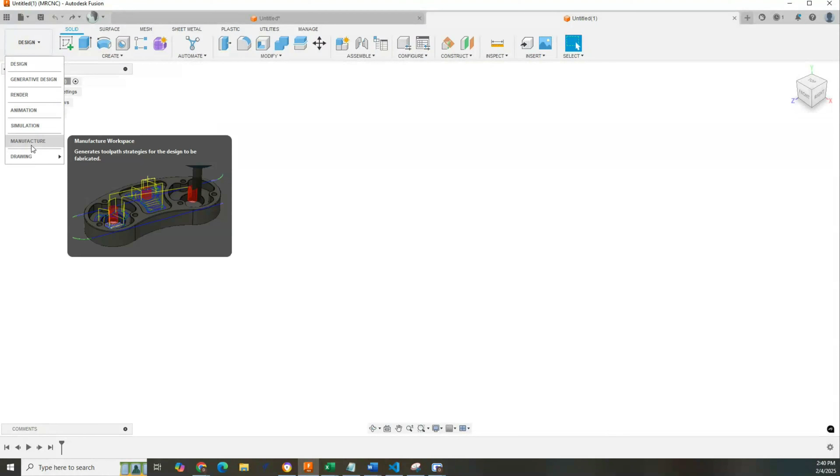As I said, I'm going to walk you through in Fusion 360 how to make that 2-inch square on the Alpha Arc. It's going to be super easy. First, I need to make sure I'm in the design workspace. There are a couple different workspaces we'll be in, but I'm going to start with the design workspace. I'm going to look at my document settings here. So I hit that little arrow. I'm in millimeters right now. I'm going to switch things over to inches. So now I'm in inches.

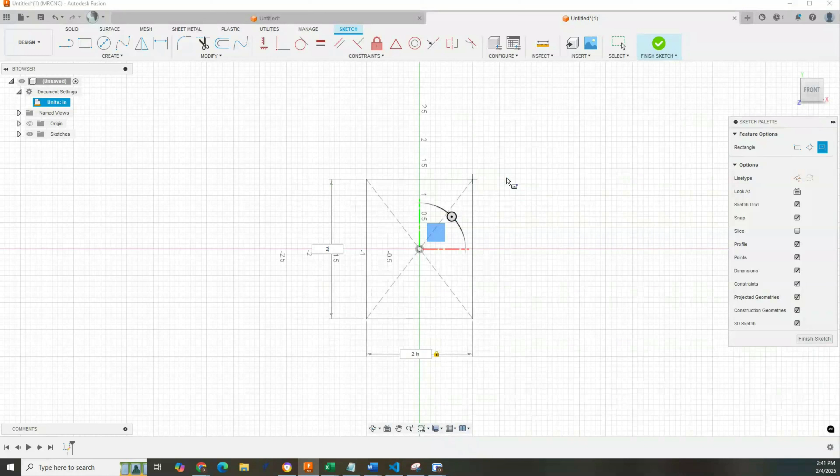I'm going to go to Create, Sketch, and I'm going to select this plane right here. And now my sketch palette is up. I'm going to go to Create Rectangle, Center Rectangle. I'm going to select this snap point. I'll click it, and as I start to expand, I can dimension it. So I'm going to hit 2 inches here. I'm going to hit the tab button. I'm going to hit 2 inches here, and I'm going to hit enter. From there, I'm going to finish the sketch.

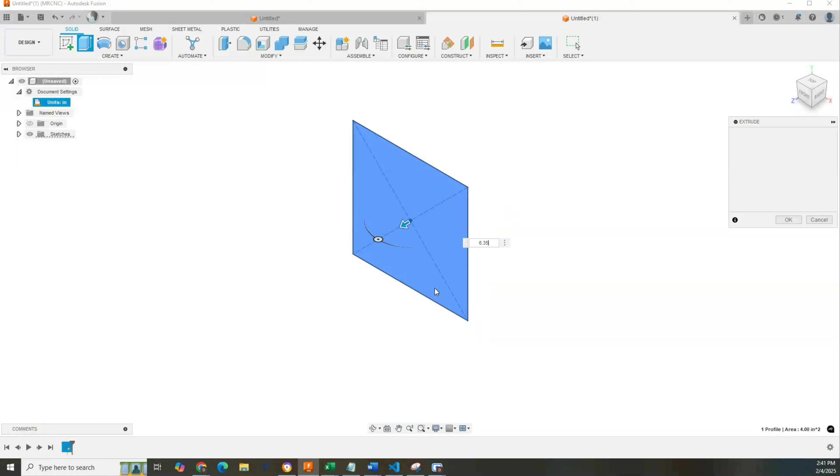Now, I could do my plasma CAM off of this sketch, but I like to have it as a solid body. So I'm going to right-click the sketch, and I'm going to hit extrude, and I'm going to tell it it's 0.25 inches. Now, I want to add a radius to this because I want to demonstrate a little bit that we talk about in the operating guide about M666 and M667, turning the torch height control on and off.

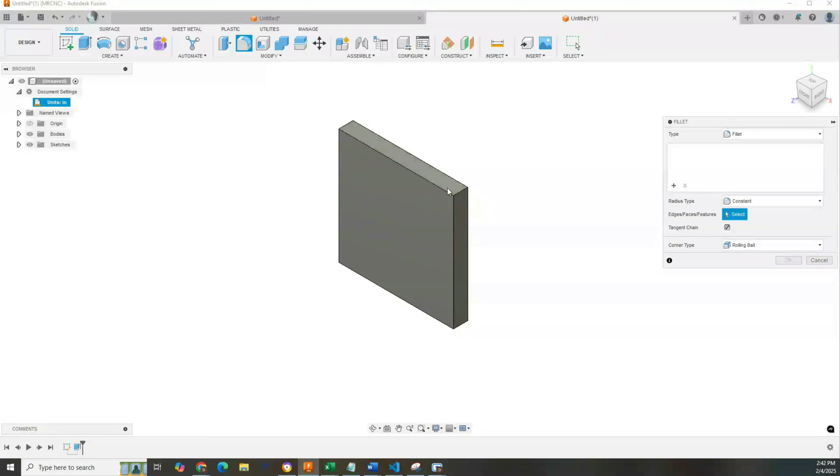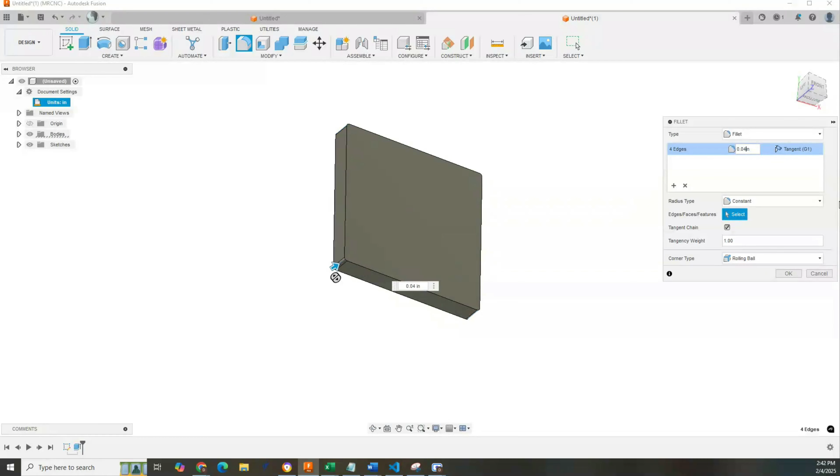So what I'll do here is I'm going to hit this radius button here, or fillet, as Fusion 360 calls it. All right, and I'm just going to select each one of these edges here. So don't select this, but select the edges there. And it'll kind of see through there. If yours isn't seeing through, you can rotate over and click this edge. So I have 4 edges selected. And I'm going to make this 0.04 inches. All right. And there's a reason I'm doing that I'll show you in a second.

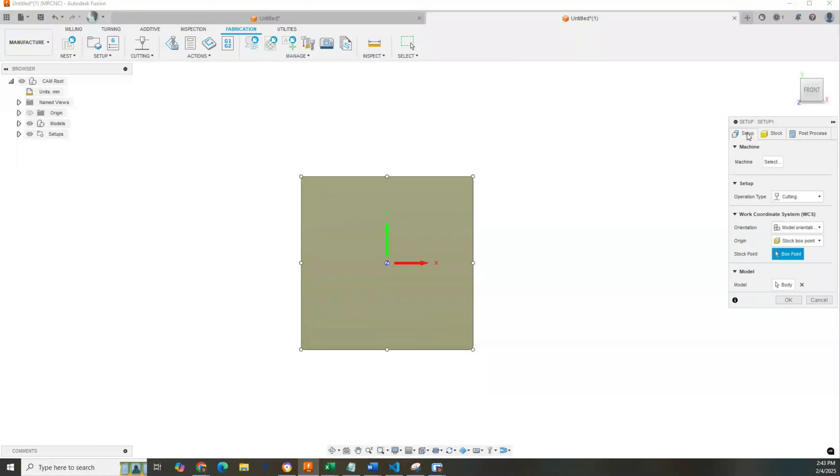All right, so from here, I'm going to switch over to the manufacture workspace. Now that I'm in the manufacture workspace, I'm going to go to fabrication if I'm not already there. I'm going to click the setup button. And on my stock, I'm going to select this lower left corner. But first, I'm going to go to the stock tab here. And I'm going to tell it I don't want any additional stock. This isn't a milling operation where I'm going to mill something away. We're just cutting this square out of a larger sheet of steel. So I'm going to go to setup, and I'm going to select this bottom corner as my stock origin. Okay. I'll tell it okay.

Now I see that my units are in millimeters here. I actually want to work in inches, so I'm going to click on that, and I'm going to go to inches. All right. From here in the manufacture workspace with the fabrication menu, not a lot of options. We just have a 2D profile. Okay, so we're going to go to 2D profile, and I'm going to go up here to this second tab where I select the contour that I'm going to cut, and I'm just going to select this contour here.

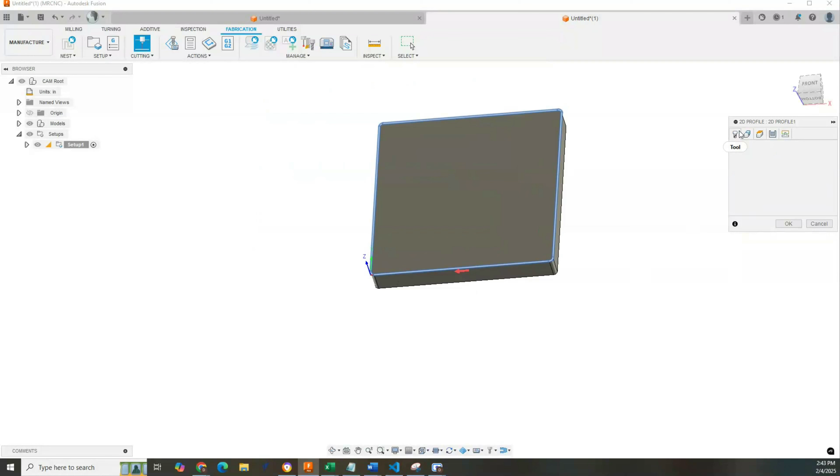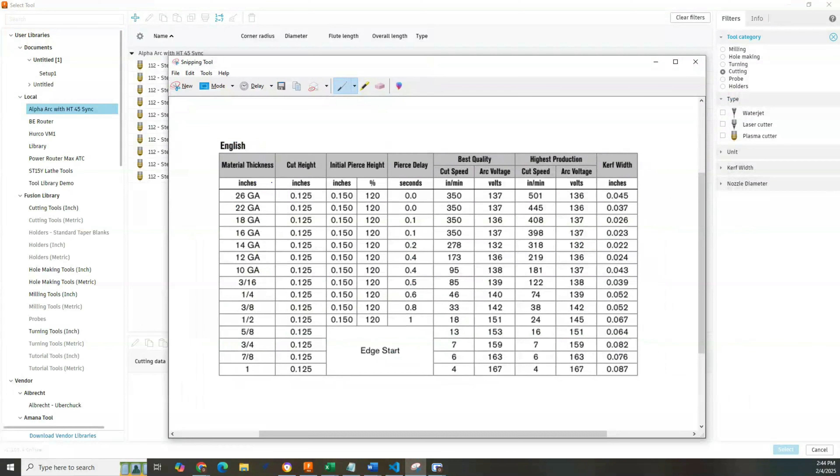I'm going to come back over here and select my tool, and as I wait on that to come up, I'll explain that I already have some things set up here. So I have this available to you. There'll be a link in the operating instructions where you can get to it. This has some of the parameters already set up for the different thicknesses that are in the cut chart for this particular Sync module.

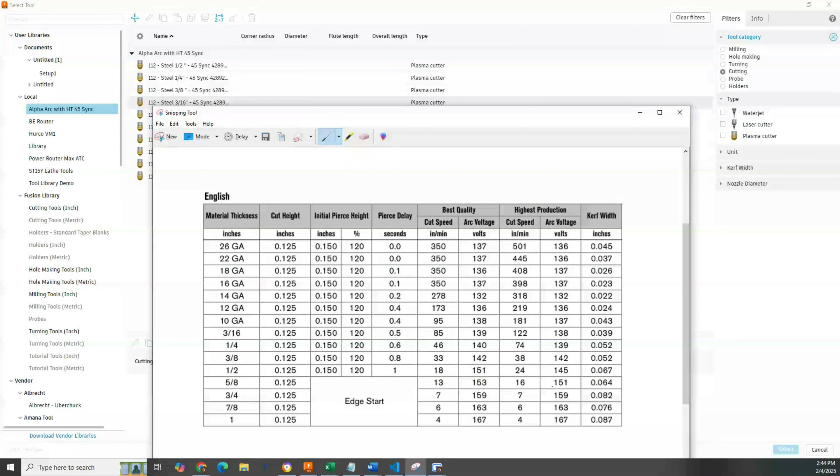So on the Hypertherm 45 Sync, this is the cut chart that you want to follow, and we talk about that extensively in the operating guide. But I have already saved a lot of these parameters, like what my kerf is for the different sizes. I've saved that in this library. So I'm just going to select steel 1/4 inch, and then I'm going to click select.

And it already put things like my feed rate. So you can see it's got a feed rate of 46. And if I look at my cut chart here, the best quality cut setting is 46.

One thing to know about this, some of these are driven by the settings or, quote unquote, the tool I'm selecting. It's all tool 112, because for the Masso control to use the plasma, it's tool number 112 always in the Masso control. But when I had that tool library, all I was doing was selecting different sizes that I had saved in there, so it would automatically load things like my cut speeds.

There are other things that are going to be selected in the post-processor options, like these initial pierce heights and cut heights. The good news, though, with this particular cartridge on the 45 sync, whether it's aluminum, steel, stainless steel, they all use the same cut height and all use the same initial pierce height. There are definitely some changes when it comes to arc voltage, but some of those that I'll show you in the post-processor options are always going to be the same on this particular cartridge. If you go over to the fine cut cartridge, then that's not going to apply, but we have charts in the operating guide for that you can follow as well.

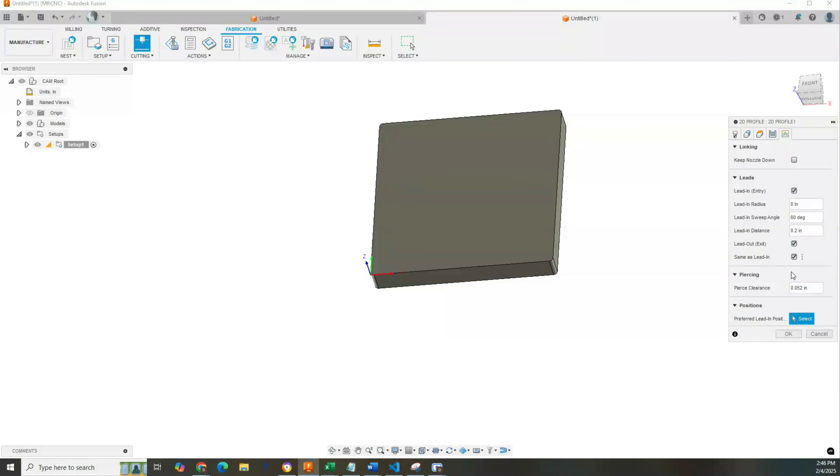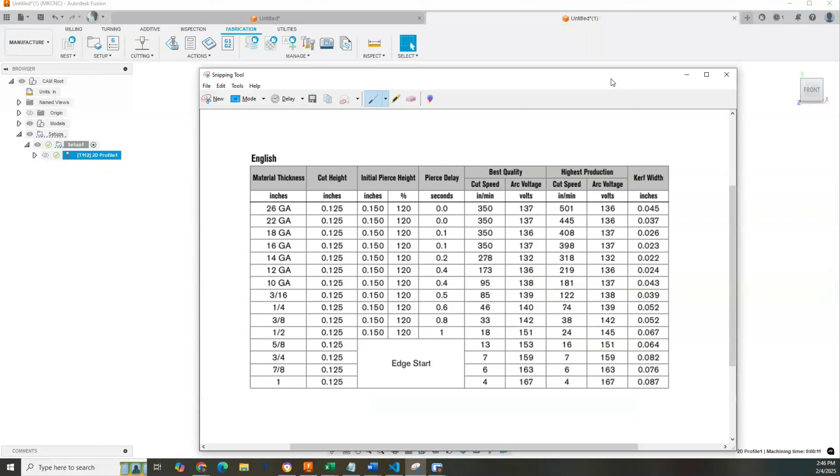So I'll move this out of the way, and I'm just going to take a look at my lead-ins over here, and I see it's doing a little bit of lead-in. We'll just make that a round number, 0.2. I don't have to, but I've got lead-in and lead-out there. So I'm going to click OK and see what it gives me. So here I have my lead-in and lead-out, and it goes around with an offset that's going to do the kerf compensation. And again, the kerf is called out here in the cut chart, and I have already saved it by saving that tool in my tool library. So it already knows that I have a 0.052 kerf.

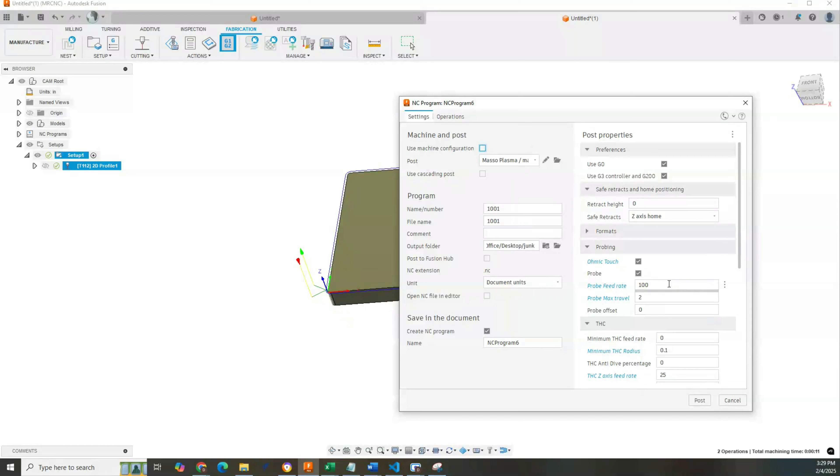All right, now that we have our profile set up, we're going to move on to post-process. So I'm going to click this post-process icon. I already have the Masso Plasma post-processor as an option in my post-processor list. We cover in the operating guide how to set that up, because you're most likely not going to have it by default in Fusion 360. So we have certain things that we must set in these post-processor options to get a good cut. And I'm going to bring over another screen here and talk about that.

The cut height is always going to be set to 0.125 inches with the sync cartridge, part number 428925. Initial pierce height, always set to 0.15 inches with the sync cartridge 428925. Probe feed rate, we recommend just setting this at 100 inches a minute and forgetting it. You may think that's a little aggressive. You can back that down to 50 or 30 inches a minute. 100 inches a minute is probably about the tippy top of what I would go on the probe feed rate.

The THC Z-axis feed rate, that is the feed rate at which the Z-axis will move when it's under torch height control. The minimum THC radius, we talk about this in the operating guide. Let's just set that to 0.1 inches and forget it. Minimum, I should learn to spell, minimum THC feed rate, set that to 10 inches per minute. If we're going super slow, we probably want to have the post-processor turn that THC off.

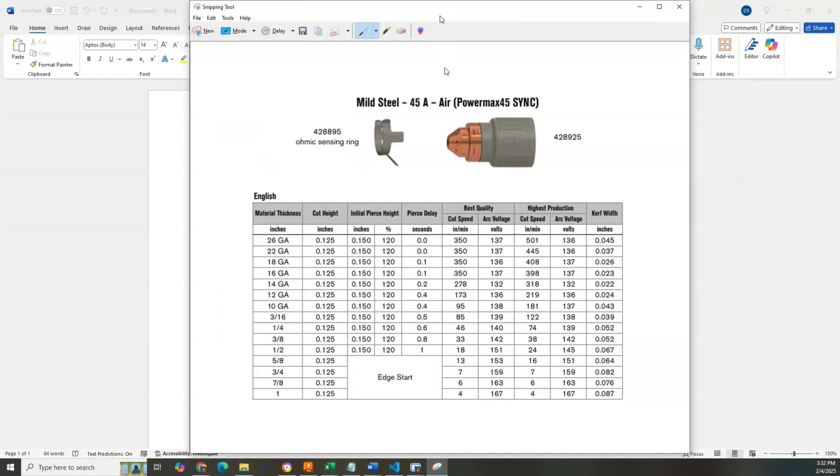All right, so I'm going to bring this up here and show you guys this. So again, the cut height and initial pierce height are always going to stay the same as long as I have this particular sync cartridge in there. But things like the pierce delay and arc voltage, here and here, I need to refer to the cut charts to get those right.

All right, so here I'm using 1/4 inch steel. I need a pierce delay of 0.6 seconds. My arc voltage should be set to 140.

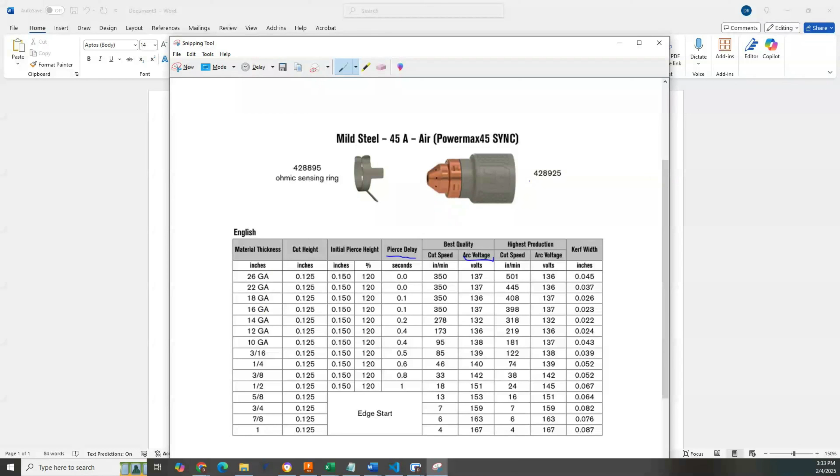Now, remember when I selected my tool, I had saved different speed settings and kerf widths or kerf offsets for this particular consumable cartridge, according to the chart here with the different material thicknesses. So let's see how we actually put it in. All right, I'll move this back over.

So the things that I need to make sure are set: the cut height set to 0.125 inches. All right, there we go.

I'm going to pause here and talk about something important. 0.125 inches means 0.125 inches. If I was in millimeters here and this said 0.125, that interprets it as 0.125 millimeters. So I just recommend doing your CAM here in inches. If not, convert these to the millimeter equivalents.

All right, so the cut height, 0.125 inches. The pierce height, it says pierce height, same as initial pierce height, 0.15 inches. The probe feed rate, I have set to 100 here. The THC Z-axis feed rate, I have set to 25. The minimum THC radius, I've got at 0.1 inches. And ohmic touch, I have enabled here. I have this checkbox enabled because I want to use ohmic touch for it.

Pierce delay, I need to refer to my cut chart. So pierce delay for 1/4 inch is 0.6. All right, let me move this away. Pierce delay 0.6.

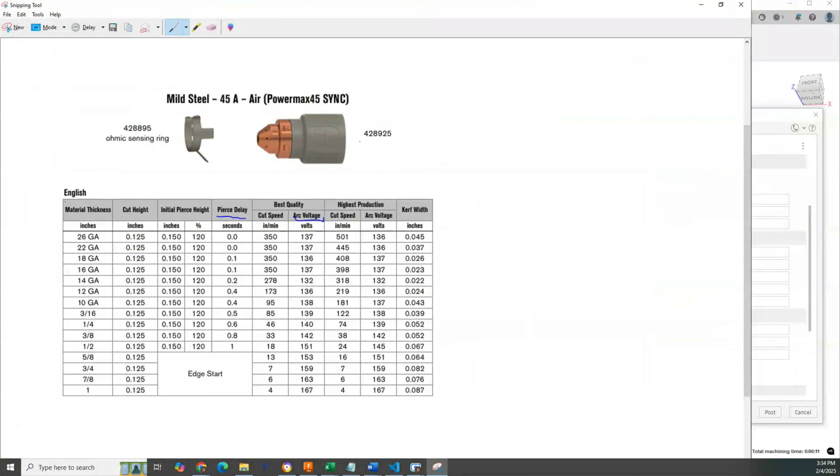THC voltage, I have to set that. So I look here, and for 1/4 inch, it's going to be 140. All right, so I'll move this out of the way. I'll set that to 140.

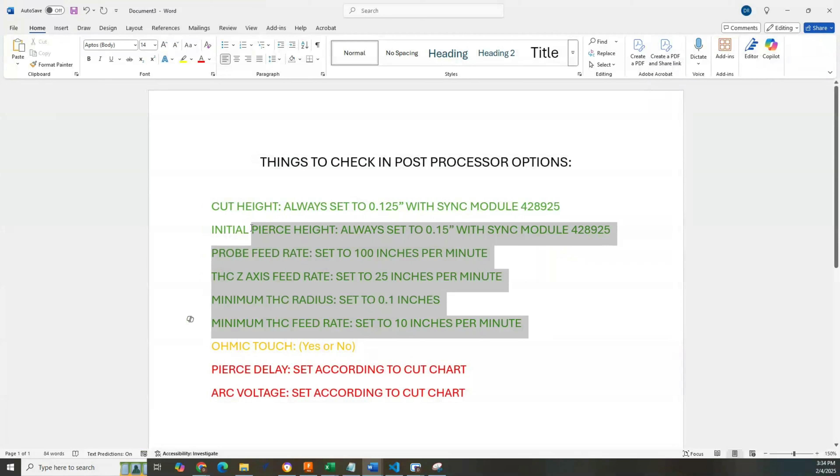Again, don't get overwhelmed thinking, oh gosh, there's so many settings, because once you set these up, it's pretty much the same every time, as long as you're using this particular consumable cartridge on the Hypertherm Powermax 45 SYNC.

This is going to depend a little bit on whether you have a little floppy thin gauge plate, or you're cutting something that you can use the floating head on, and maybe you've got a bunch of water on there. Refer to the operating guide for the do's and don'ts on that.

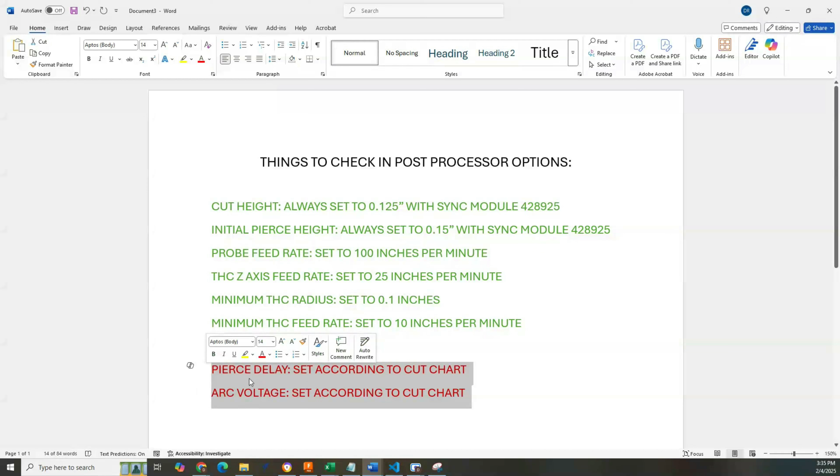But the big thing I want you to take away from this is your pierce delay and arc voltage, you need to set up in your post-processor options. You set it up the first time here walking through this with me, and you'll be good from then on, so long as you leave your units in inches.

All right, so I have what I want there. I'm going to hit post. I want to overwrite that G code. Yeah, sure, I'll overwrite it. You probably won't get that because it's the first time you've done it.

I'm going to view my G code here. And there's that G200 that was talked about in the operating guide. So all of those things that we filled in there populate this G200, and it tells the Alpha Arc how it's going to handle different things like the pierce height, cutting height. So you see all of those parameters that we entered are expressed here in the G200 command.

And you see here where we've got like M666, it looked at this radius coming up, and it said, whoa, that radius is under the minimum THC radius of 0.1 inches. So I need to turn off the torch height control. It finishes it, and then it turns it back on. So it seems like a lot, but just know, as long as you set those parameters in there, most of which are set it and forget it, the CAM software, in this case Fusion 360, takes care of everything.

So we're going to run this out to the machine. I'm going to show you the buttons to press, and we'll make a little 2-inch square out of some 1/4 inch steel. Let's look.

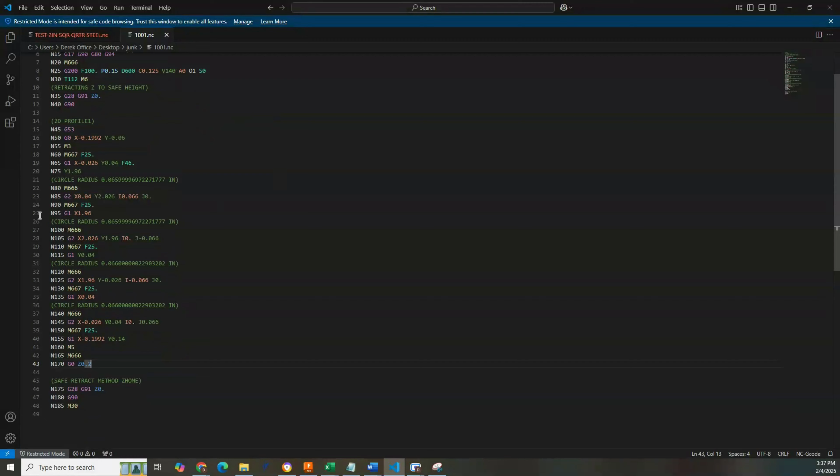So I've just put the program that we made in Fusion 360 onto this USB drive. I'm going to insert that here into my Masso. So let's say I just turned the Masso on. It was going to ask for the password, which is capital H, capital T, capital G. Then I would have to cycle the e-stop, so that's just pressing it in and then turning it back out.

I double click the home button. It'll be flashing yellow and say home, double tap. I do that, the machine's going to go home. Then I can go over to my F3 jog and probing screen.

When you first do that, it's going to be set to step mode. I'm going to switch over to continuous, and then you can adjust your feed rate. There's a slider here where you can adjust that.

I'm going to go ahead and put this in my hand because I might use it in a second, my jog wheel. I'm going to come in here, and I'm going to now use this to get exactly where I want. So I'm going to push the screen out of the way so we can see a little bit. All right, I'm just going to put this about where I want it to be for starting the cut.

If you remember, we zeroed to that bottom left corner, like if you were doing a top-down look on it, that bottom left corner is where I zeroed out. So I'm going to set that origin appropriately.

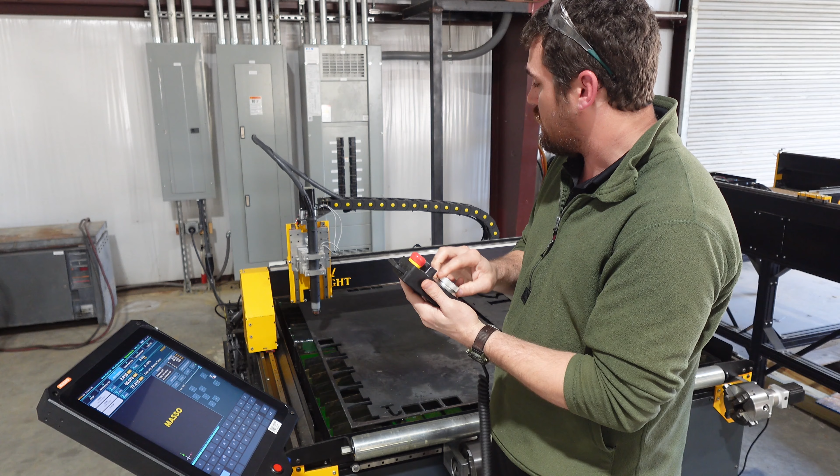I'm going to come over here and position a little bit in the Y, just swapping over here to the different axes on my MPG hand wheel. I'm going to go ahead and Z down a little bit so I can see better about where I'm going. And that looks like a pretty good start point for me.

Cameraman, can we see our torch head there?

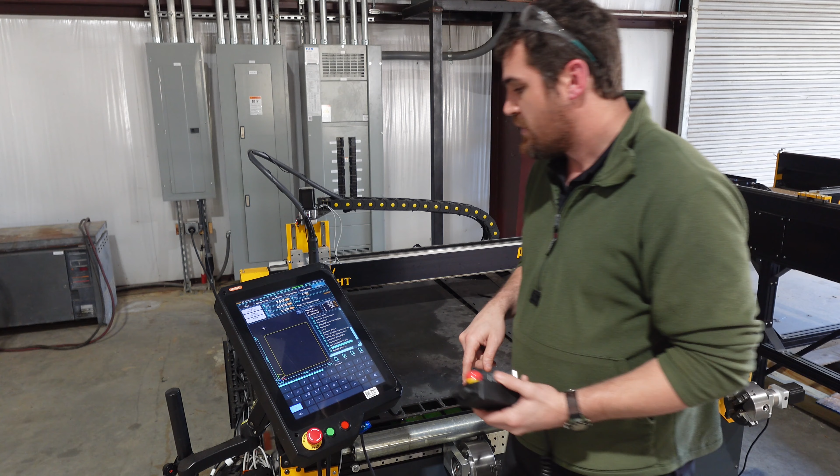Great. Okay, so I'm going to go to the F6 load file screen. I go to load file, and I named that test 2-inch square quarter steel. I'm going to hit load, and don't know how well you can tell from the video, but it's projected things out here. So I have a little icon, like a little white cross there, that's going to project where the cutting head is relative to my origin.

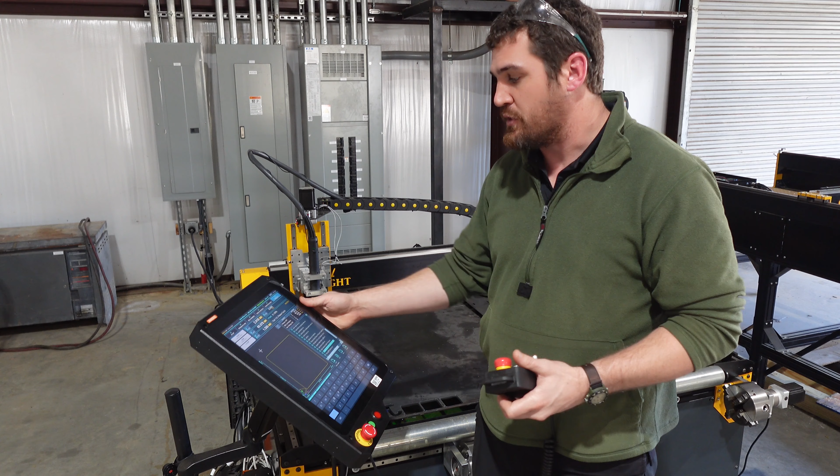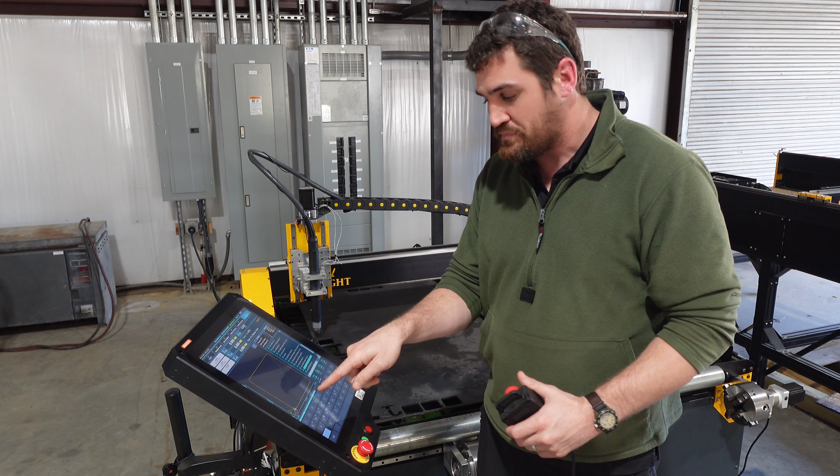So what I have to do is zero my X, Y, and Z for where I want the starting point to be. I thought this location of the head was a pretty good one, so I'm going to hit X0, Y0, and Z0. And as I do that, that little white cross will go to the origin of the work.

Alright, so I think maybe I want to move over a little bit. I'm going to switch over to my X-axis and come back over here to the F3 jog and probing screen. You see I'm moving the axis over. Maybe I want to move a little bit in the Y, so I switch it over to Y there. And you know what, I'm happy, so I'm going to hit X0 and Y0 again. So before I start, I see 0, 0, 0 for X, Y, and Z.

Alright, I'm going to stick that back down. I'm going to go over to F2, Program and MDI. I'm going to hit the rewind button. Okay, so F2, I'm going to hit rewind.

I have my code up, and before I start, I know that I've got my Hypertherm unit on. I know that I've got the air plugged into it. Obviously, if you don't have it on, you're going to get a no arc error, but I already know I have that on. So I'm going to hit the rewind button.

I'm going to hit start cycle. The head's going to come up because I have a G-code in there to run up to a clearance height. The head's going to come up, and then it's going to come back down as part of its ohmic plate detection sequence. It's going to find the plate, come up to its initial pierce height, pierce, wait the delay, and then start traversing the THC.

If you remember in the code, it turned on and off as it rounded that corner. So you may see the Z-axis make some tiny adjustments in the straightaway and then lock down as it rounds the corner, then maybe make some more tiny adjustments. It may or may not, depending on what the torch height control determines. But that's enough talking, let's cut something. So I hit rewind, I'm going to hit start cycle, and I'm going to get out of the way.

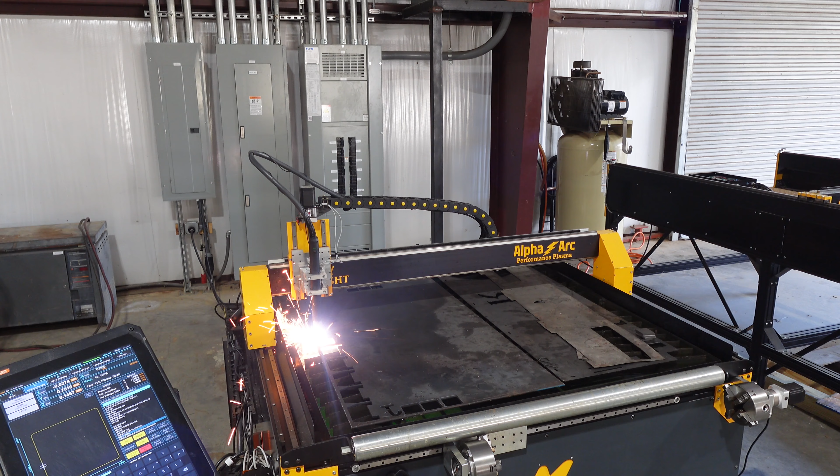All right, so I'm going to talk loud here because we've got the post flow, and now it's cut off. That's the post flow from the plasma, it's supposed to do that. So it keeps blowing through for a set period of time.

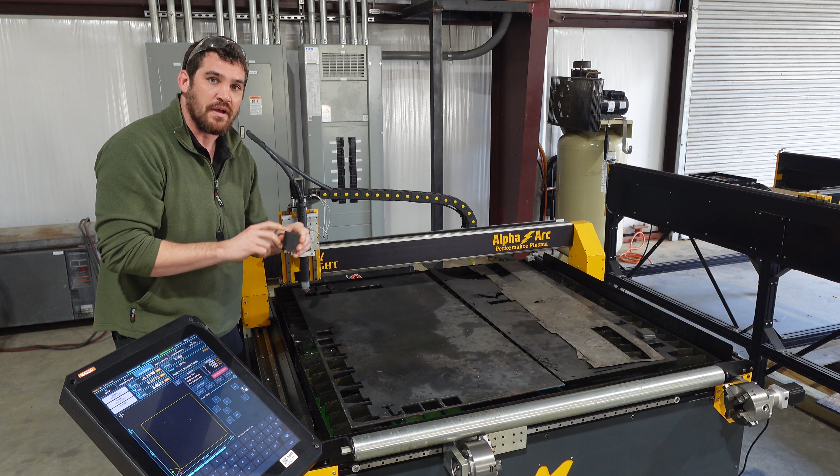And now I'm just going to fish out what I cut here. So here is my 2-inch square that we cut out. There's little bits of slag that you're going to have whenever you cut something. Most of this will flake right off in your finger, and then you can take a little slag hammer and do the rest. But that's your first cut on the Alpha Arc Plasma.